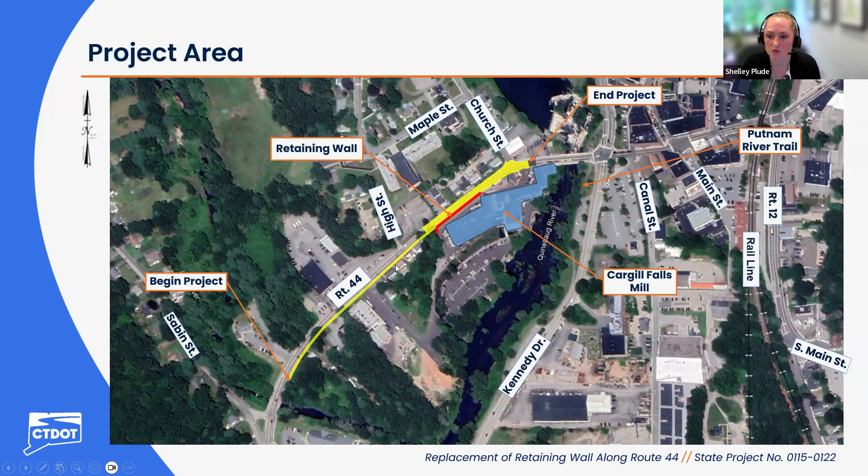Zooming in on the wall, it actually extends for the majority of the length of the north side of the Cargill Falls Mill property. We are proposing to replace roughly 340 feet of that wall, shown here in red. This is the portion of the wall that directly supports the roadway above. The portions shown here in blue are the portions of that existing wall that will remain.

While we're here looking at the mill, I wanted to acknowledge the operations of the mill facility, which is currently a mixed-use residential and commercial property. We have the main entrance to the mill, just north of Church Street, which feeds into a small parking area and then leads into a one-way travel lane around the north side of the mill, which does eventually connect to the parking at the rear, and then a secondary entrance further south on Route 44.

I wanted to point out two locations that are going to be important moving forward. We have two what we're calling pinch points where the wall is in very close proximity to the mill building. On the north side of the mill, we have a pinch point that's just over 11 feet, 11'3". And on the south side, we have another pinch point, a little bit wider, about 11'7". That's going to factor into the construction of the wall and our various alternatives.

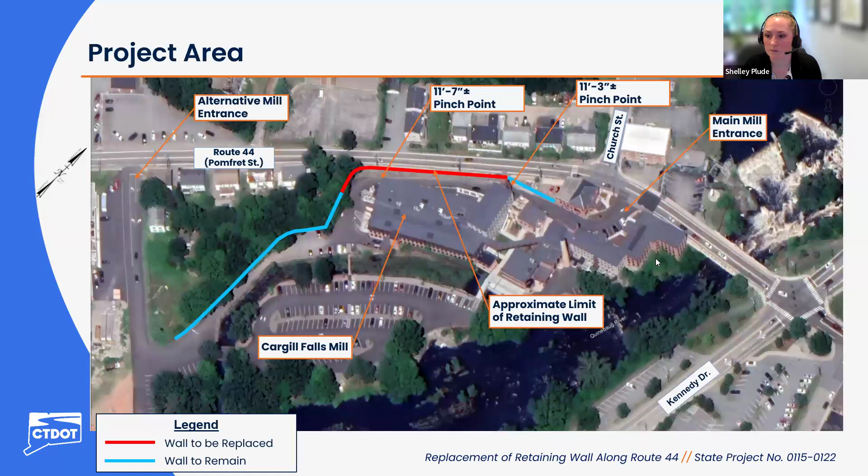So some existing conditions photos. The photo on the left here is Route 44 facing northeast. Just to orient everyone, the wall is on the right side here, roughly where that fence line is. We have an existing sidewalk above the wall, existing overhead utilities also above the wall.

Another feature I want to point out about this site is that we have a second set of retaining walls along the north side of the road. Those walls are not included in the scope of this project. They do roughly represent the limit of the state's right-of-way on the north side of the road. You can see those here as well in the photo on the right looking southwest. So that wall roughly is the limit of the right-of-way, and then we have the wall here, which just emphasizes the relatively narrow space that we have to work on this project.

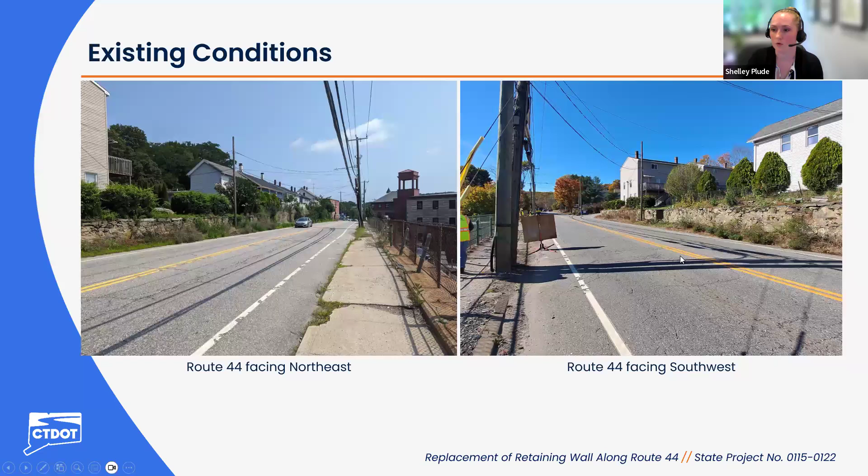Now the wall itself is primarily a dry stack stone wall. There are some mortared masonry sections. On the right side here, you can see that first pinch point, which is roughly 11'3". The wall height here is about 14 feet. The wall increases in height to roughly 30 feet or so at the southern end of the mill, which is where we have that second pinch point, about 11'7". Now, the reason why we're replacing this wall is because it is in poor condition.

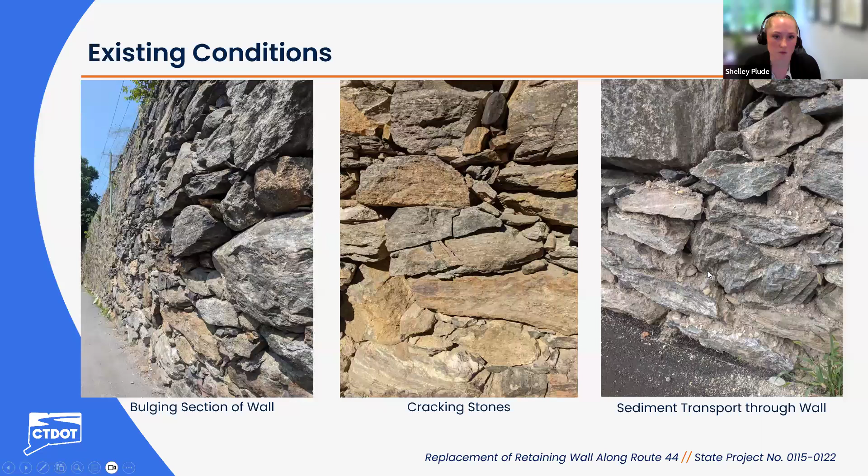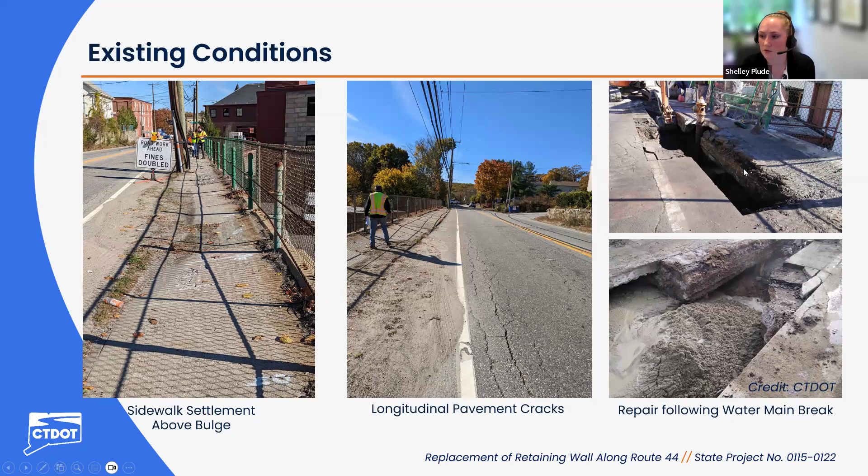We do have a section of the wall that is bulging. We also have a number of cracked stones and then sediment which is coming through the wall between the voids and the stones. That sediment movement is contributing to some settlement above the wall. You can see in the left-hand photo and the center photo that the sidewalk above the wall is settling. We've got a low point here, some cracking in the pavement that's a result of that settlement. Contributing to this was a water main rupture at a hydrant a number of years ago, which resulted in a loss of material behind the wall. These photos are from that repair by the department a few years ago.

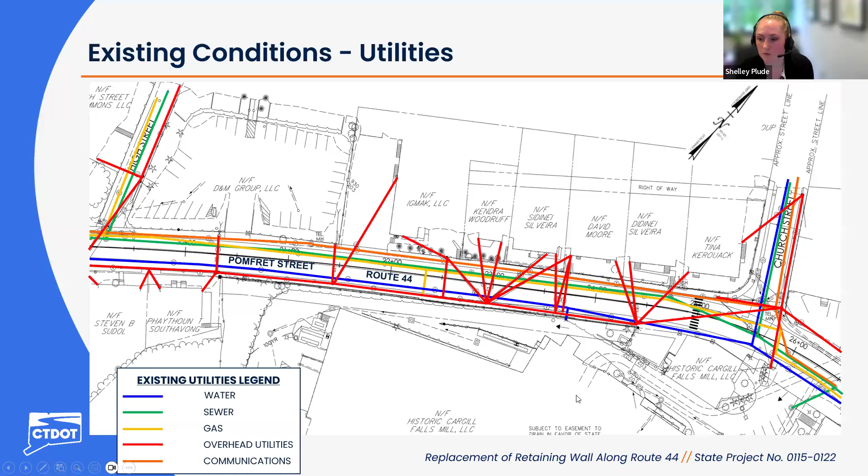Now, in addition to the wall and the other site constraints, we do have quite a few utilities out here. We have an existing water main owned by the town of Putnam in the eastbound lane, on the south side of the road behind the retaining wall. We have a sewer main also owned by the town in the westbound lane on the north side of the road. We have a gas main, which generally runs along the sewer main. We also have an extensive network of overhead utilities, located primarily above the wall, with a number of service connections to properties on the north side. Last but not least, we have an underground telecommunication duct which runs along the edge of pavement on the north side of the road. So all in all, we have quite a few utilities we're going to be working with and around, and I'll get into those impacts later on in the presentation.

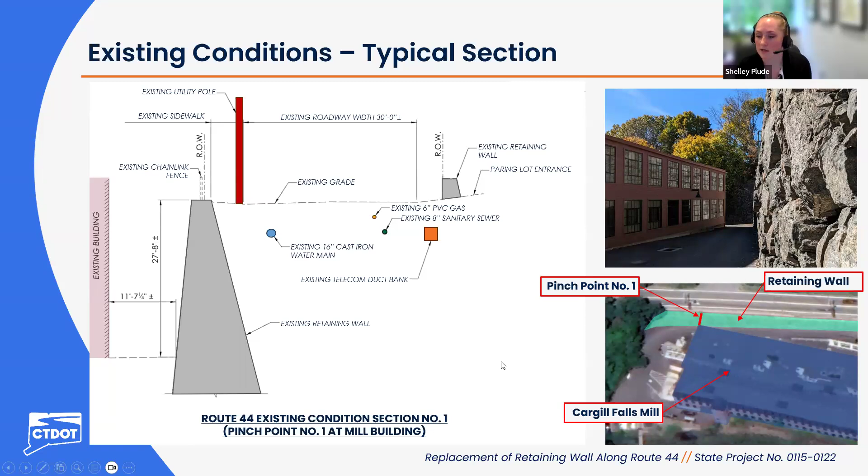And just to emphasize how tight our construction site will be here, this is from some utility work that was being done on the mill several months ago. This is the tighter of the two pinch points, that 11 foot 3 inches. This is not going to be altered under this project. This portion of the wall on the right side of the photograph is proposed to remain. We're replacing roughly from that angle point down, so this pinch point will remain.

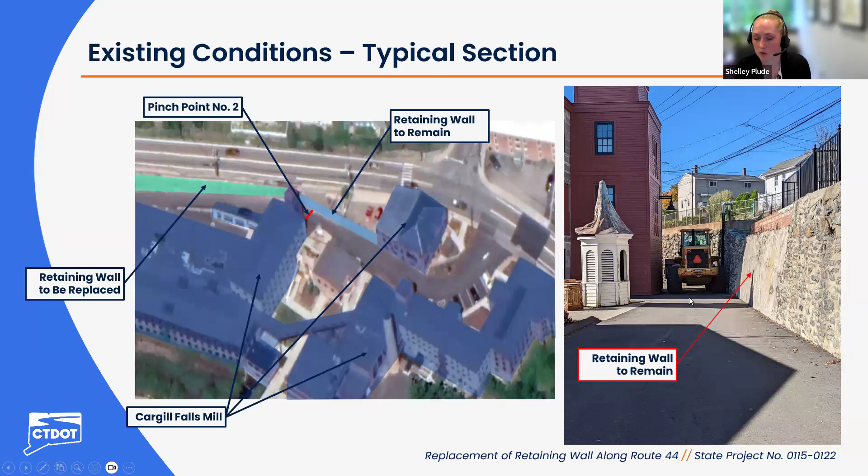Now, as Kevin mentioned, we are aware that the Cargill Falls Mill is a historic complex, founded in 1806, and is listed on the National Register. As Kevin said, the wall itself is not included in that listing, but it is considered a contributing element to the site, and as a result the project has received an adverse effect determination. So what that means is we will have certain mitigations throughout the course of the design. Some of that will include considering the nature of the site when developing aesthetic treatments, and then documentation, namely photo documentation of the existing wall by a historical consultant prior to the wall being removed.

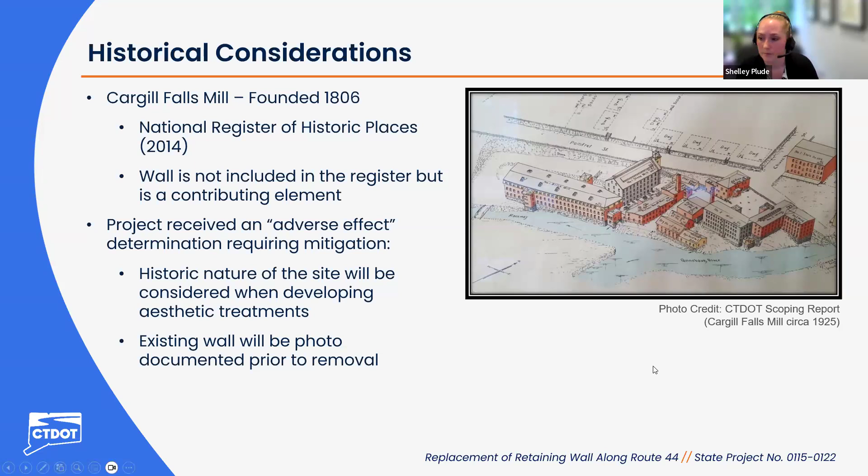As part of this project, we also looked at the crash history on Route 44 to see if there were any concerns with the roadway. Over the last 3 years, from 2020 to 2023, there were 2 crashes identified at the High Street intersection and a total of 4 crashes identified at the Church Street intersection. This data didn't produce any notable trends or indicate any potential concerns with the roadway configuration, so there will not be any major alterations to the road or the adjacent intersections.

Now, for the proposed roadway work as part of this project, I'll get into the wall in more detail in a moment. We're proposing to reconstruct roughly 500 feet of Route 44, between High Street and Church Street, and then we'll mill and overlay the Church Street intersection. Included in that roadway work, we'll be installing a series of 4 catch basins. Under existing conditions, there is not much in the way of drainage between High Street and Church Street, so we'll be introducing some catch basins here, connecting that to an existing system north of Church Street.

The sidewalk within the roadway reconstruction limits is going to be replaced with a sidewalk that'll be a consistent 7 feet wide, to accommodate sufficient space behind each of the utility poles located in the sidewalk. We'll be extending that sidewalk reconstruction down Route 44 for just under 800 feet to address the existing condition of that walkway. Because of the impacts to the mill when removing and replacing the wall, we will be repaving a portion of that mill travelway, and we'll have some incidental driveway apron reconstructions and minor sidewalk work.

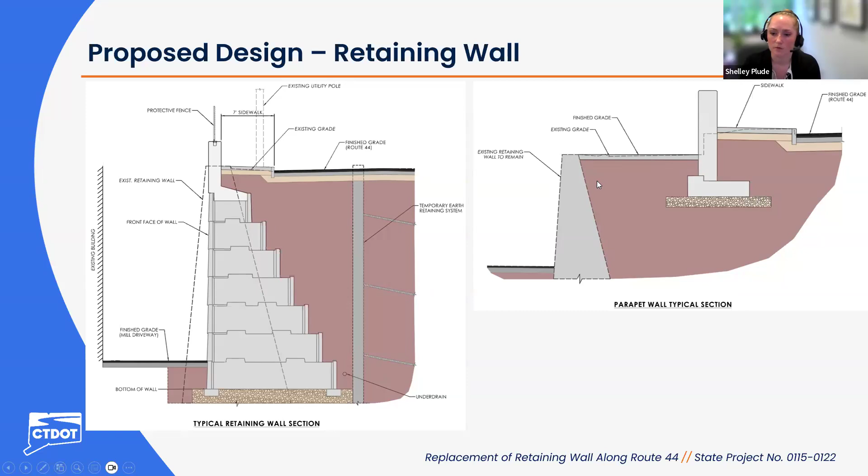We will have quite a few utility impacts. As noted earlier, there are a lot of utilities within the corridor, and we will be impacting a number of them. The overhead utilities will be relocated twice: right now they're on the south side of the road, they'll be temporarily relocated to the north side, and once wall construction is complete, they'll be relocated back to their current location. Both the water and sewer mains will be replaced as part of this project. During construction, they'll both be temporarily bypassed, and once the wall is complete, they'll be reconstructed generally in their current alignments. We'll also have some minor impacts to the gas and telecommunications lines through resetting of valves and manhole resetting.

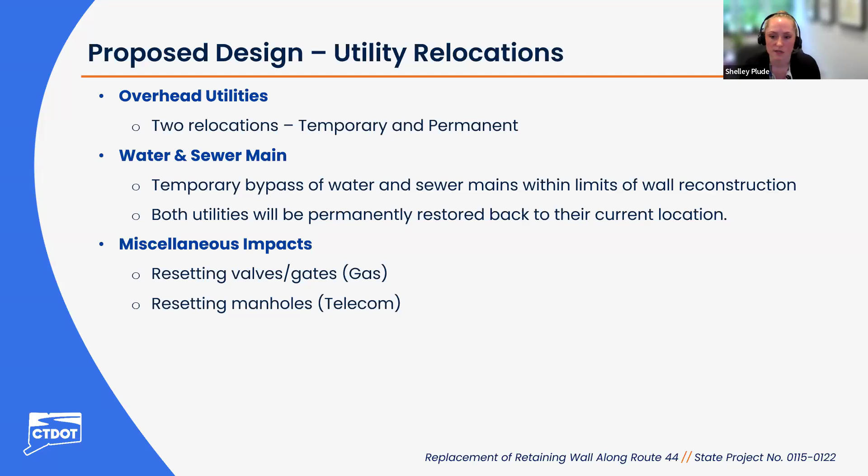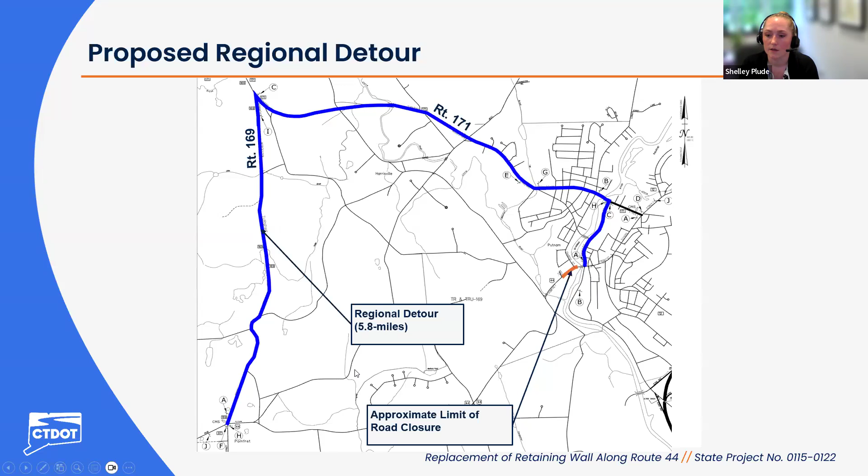Because we have to encumber the majority of the road to build this wall, we'll be excavating the majority of the eastbound lane to remove the existing wall and install the new one. We'll have very limited space above or below the wall at the Cargill Falls Mill, so we're proposing to close the road during construction. We'll have two detours: a local detour via Kennedy Drive to Bridge Street to Recreation Park Road and down Sabin Street, roughly 1.6 miles. We also have a regional detour to capture truck traffic moving through the area, diverted onto Route 171 and 169, roughly 5.8 miles.

Because our construction site is so tight, we do have a number of rights-of-way impacts. I'm going to go over some of the specifics of that first, and then I'll turn it over to Matt to discuss the formal process.

We do have a couple of what we call sliver takings. We have a couple of locations where the existing sidewalk or the proposed sidewalk just clips the limit of the right-of-way, so we'll do a very minor taking in order to address that right-of-way issue.

One of those is located at the secondary or rear entrance to the mill complex and the property adjacent to that - you can see that very small area where the sidewalk clips the right-of-way line. The second location is on the southern side of the mill and the adjacent property, where the existing sidewalk does go over the right-of-way line.

We have a number of temporary and permanent easements as well, which I'll go into more detail on in the next slide. All in all, we're affecting a total of 14 properties.

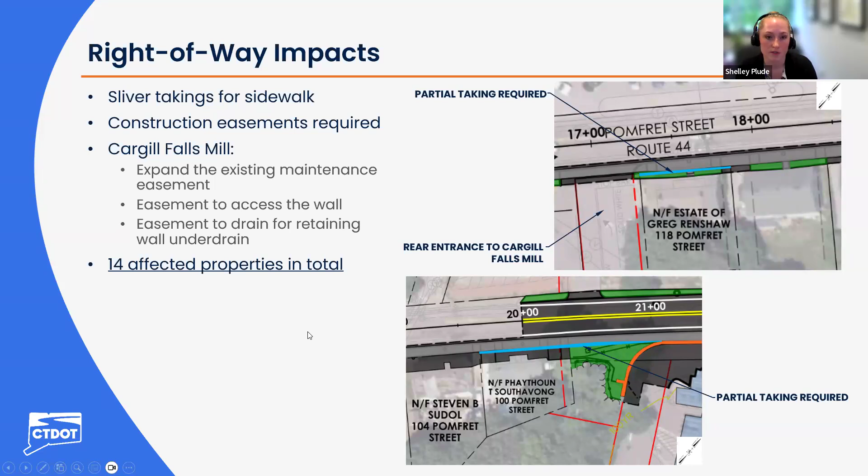In addition to those permanent easements, we'll have a number of temporary construction easements. On the north side of Route 44, these construction easements are largely related to the overhead utility relocations. Those are going to be put on the low side of those secondary retaining walls, but there will be an aerial trespass of the overhead lines.

We also have the temporary earth retaining system and the anchors for that - we'll have an underground encroachment onto some of the properties on the north side. That's also the case here on the southern side of the wall. And because the work area is so limited, we'll be obtaining a construction easement from the mill as well to be able to complete this work.

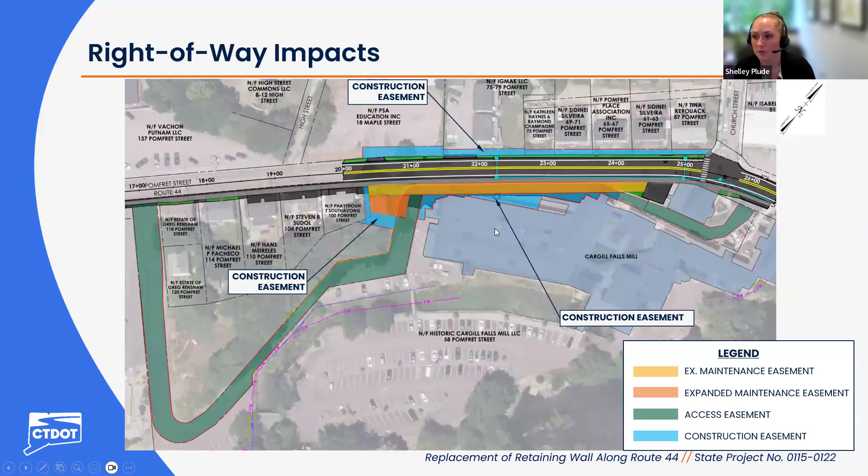I will pass things over to Matt so that he can talk about the actual rights-of-way process. Thank you, Shelley. I'm Matt Giannakopoulos, a project coordinator with the department's Division of Rights of Way. It is our office's responsibility to acquire the property rights that are needed for transportation projects.

As Shelley just outlined, the proposed project design would require the acquisition of some property rights. I'm here tonight to expand on that a little bit and give a brief rundown of our process.

First, I'll elaborate a little bit. When we refer to partial taking, we're referring to a situation where the department needs to acquire a small portion of a property - in this case, just that narrow strip along the frontage.

When we refer to easements, that is a type of property right that the department acquires when it needs to use private property for a specific purpose, such as access or specified construction activities, but it doesn't need to own the property outright. So when I refer to property rights, I'm referring to both partial takings, partial acquisitions, and the easements that Shelley just outlined.

Any necessary property rights that are required for the project will be acquired in accordance with Connecticut General Statute sections 13A-73, 13A-98E, and whenever there is federal money used in any phase of a project, the department must adhere to the Uniform Relocation Assistance and Real Property Acquisition Policies Act of 1970.

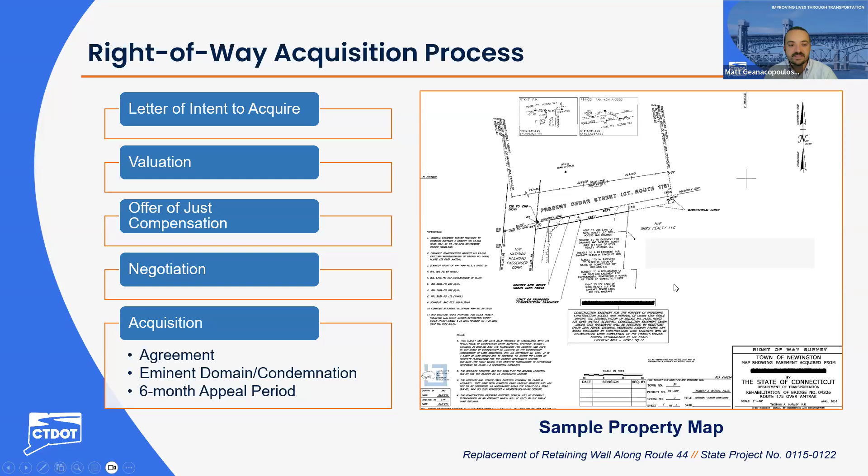Thanks, Matt. So just to wrap things up, the total proposed construction cost of everything that we've discussed here today is coming in at just over 10 million. The construction will be funded jointly by 80% federal dollars with a 20% state match.

We are currently in preliminary design, so the design completion date is proposed to be December of 2025, with the project being advertised for bid in January of 2026, followed by a construction start time in May of 2026.

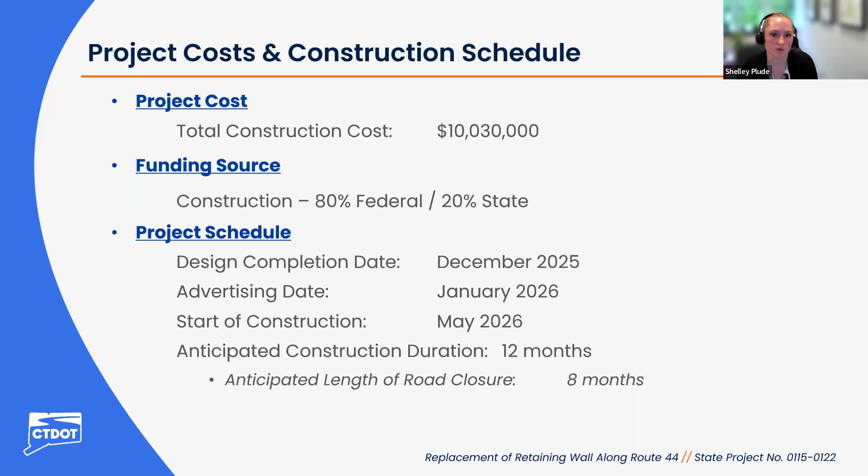As of right now, we're anticipating a total construction duration of about a year, and the anticipated duration of the road closure is about 8 months. The reason for the length of that closure, we have to remove the existing wall, replace it, and then we have all of the utility relocations and reconstructions that I discussed earlier, and the roadway work. All of those activities will be taking place over the course of that closure.

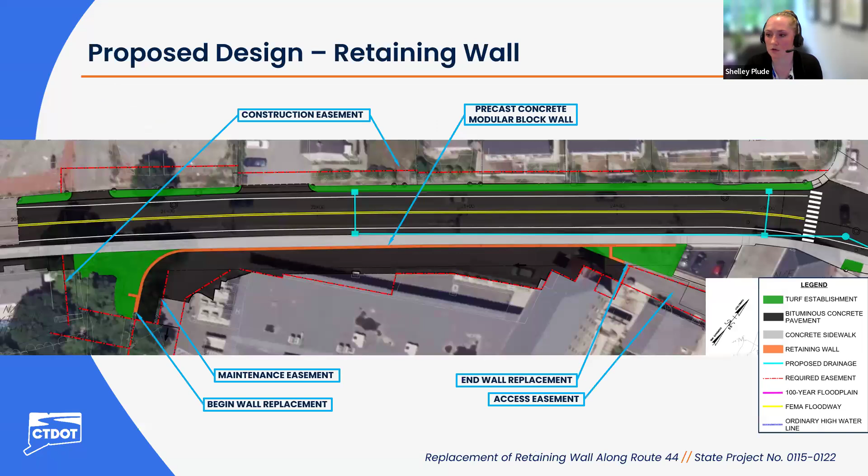That's another question, Shelley. Will we be able to access the sidewalk going out from the east entrance of the mill towards Kennedy Drive? Let me go back to the screen. The main entrance to the mill is going to remain open, it just won't be accessible through traffic down that one-way travel way. Looking at the sidewalk going out east, this sidewalk east of the main entrance is not going to be affected, so that will remain open. The sidewalk through the project limits is going to be closed, and we'll have some pedestrian detours and accommodations, but the sidewalk outside of the radio station, east of the project limits, will be open.

Will the first entrance of the mill be accessible by the radio station, or will that be blocked with construction equipment? There will be construction activity coming in and out, but the intent is to keep that open. There's some parking area there for the leasing office and whatnot, so that entrance area will be kept open. There may be periodic need to get construction equipment in and out, but the intention is to keep that open. It'll just be closed beyond that parking area, so we can perform all the necessary construction activities.